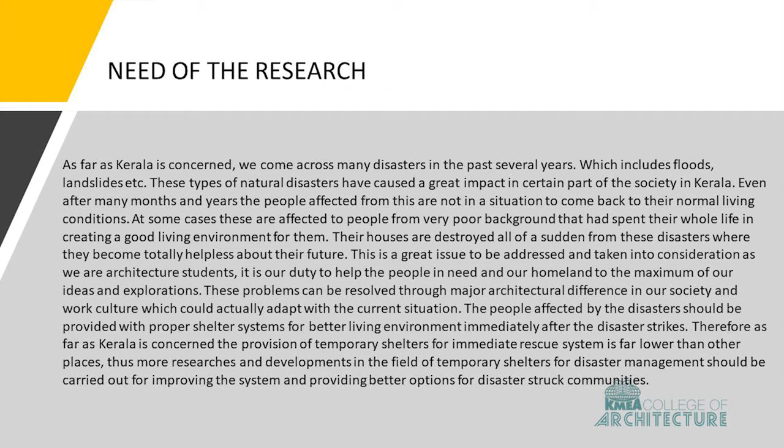The importance of these temporary shelter systems comes in the immediate aftermath of the disaster, and if these temporary shelter systems are properly executed, it can reduce the impact of the disasters and also provides better livable spaces for the disaster struck people until a permanent solution is carried out. So the topic explores the role of prefabricated modular structures in disaster rehabilitation.

Now coming to the central research question, how prefabricated modular structure systems can be used in creating livable space for different phases of disaster rehabilitation process. And the main aim of the research is to study the possible improvements in various phases of disaster rehabilitation with prefabricated modular structures.

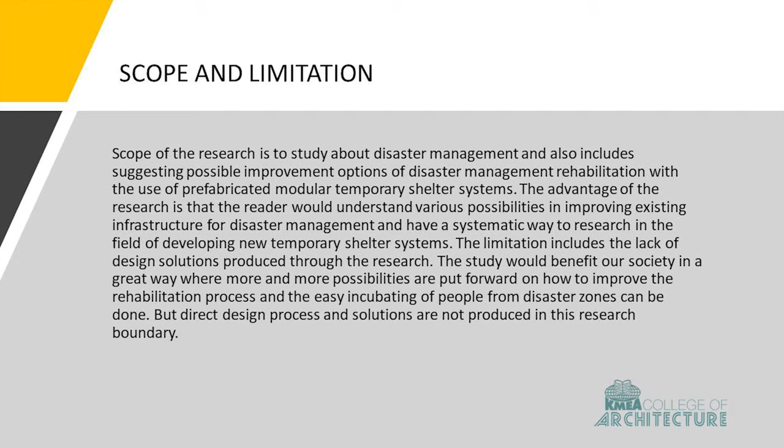The main aim of the literature review is to find out the importance and role of prefabricated modular structures in disaster management and various application and examples of temporary shelters around the world during a disaster. So the first part of the literature review is a study on disasters and its types, which includes various recurrent disasters happening in India and its impact on the society, economy and life of the people.

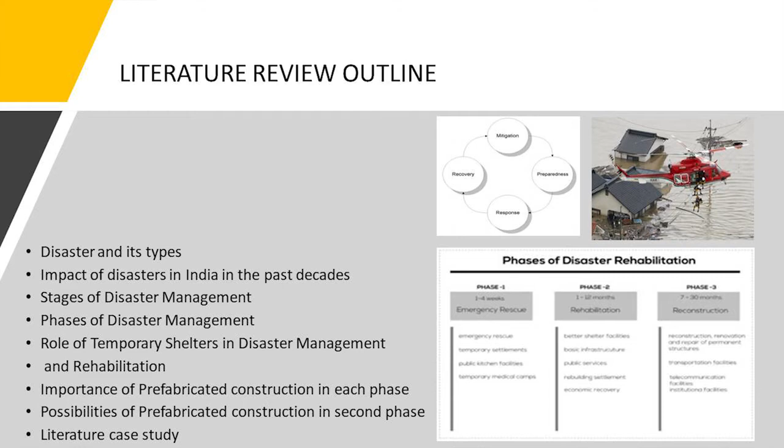Once this part is over, different stages of disaster management are discussed, namely mitigation process, preparedness in disaster management, response systems after disaster and rehabilitation process. Now elaborating on the rehabilitation process, it is divided into three phases. These three phases are studied in detail and further analyzed to know which phase requires more involvement of temporary structures.

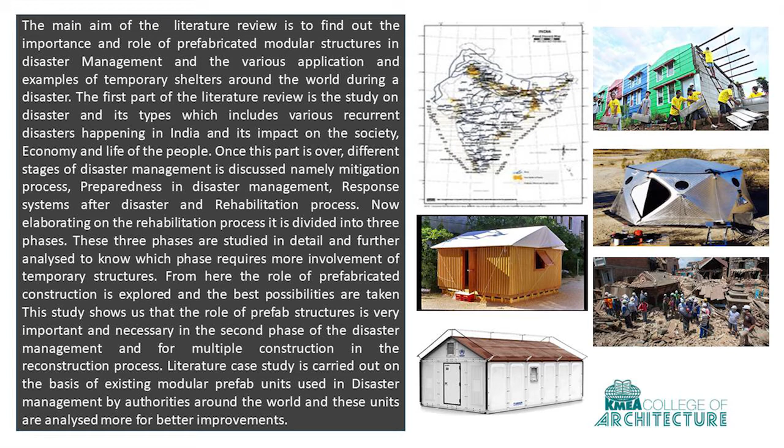From here, the role of prefabricated construction is explored and the best possibilities are taken. This study shows us that the role of prefabricated structures is very important and necessary in the second phase of the disaster management and for multiple construction in the reconstruction process.

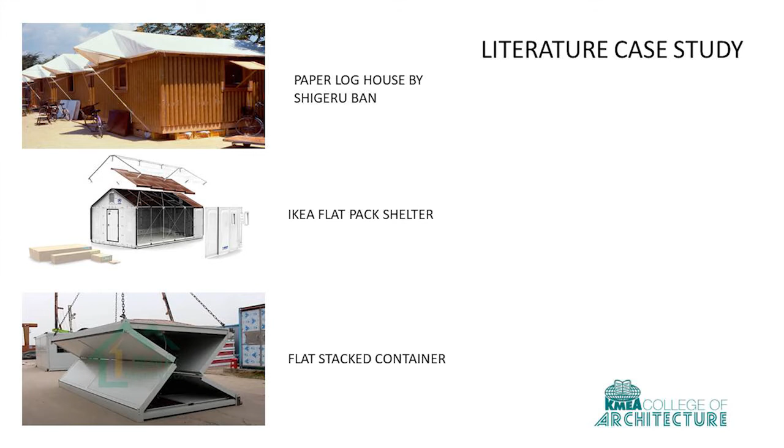Literature case study is carried out on the basis of existing modular prefab units used in disaster management by authorities around the world, and these units are analyzed more for better improvements. The literature case studies done in the research are Paper Log House by Shigeru Ban, IKEA Flat Pack Shelter Systems, and Flat Stacked Container Solutions in Japan.

As an inference from the literature review, we can come to an understanding that the disaster management and rehabilitation process could be made easier and faster with advancement in technology, innovation and exploration of materials. Certain materials such as containers, sandbags, cardboard tubes, fiberboards and bamboo are really effective in creating fast structures for rehabilitation and incubating people from disaster zones.

The knowledge gap of the study is that around the world there are many examples of optimum shelter systems which have to be analyzed and applied in our context. Throughout my research, I have analyzed a few good examples of temporary shelter systems. Once the analyzing part is over, the best possible improvements in terms of materials are provided according to Kerala's present situation. Therefore, the study provides a systematic manner for gathering information and details towards providing optimum temporary shelter systems for Kerala with prefabricated modular structures.

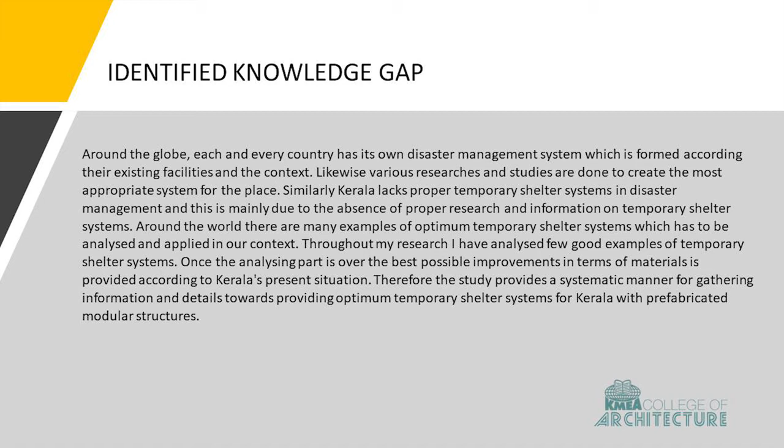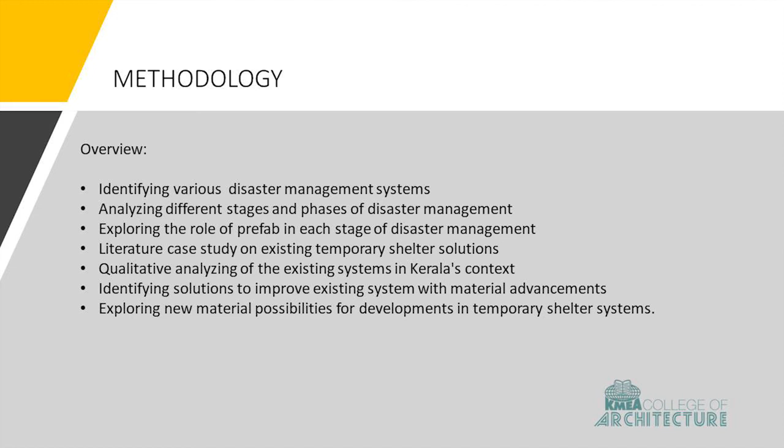This chapter presents the methodology that was followed to complete the dissertation objective. So the first part of the study goes on with identifying different disaster management systems around the world and also analyzing different stages and phases of disaster management as mentioned in the literature review. Once this part of the study is done, the research goes to the second part, that is exploring the role of prefabricated modular structures in each phase of the disaster management.

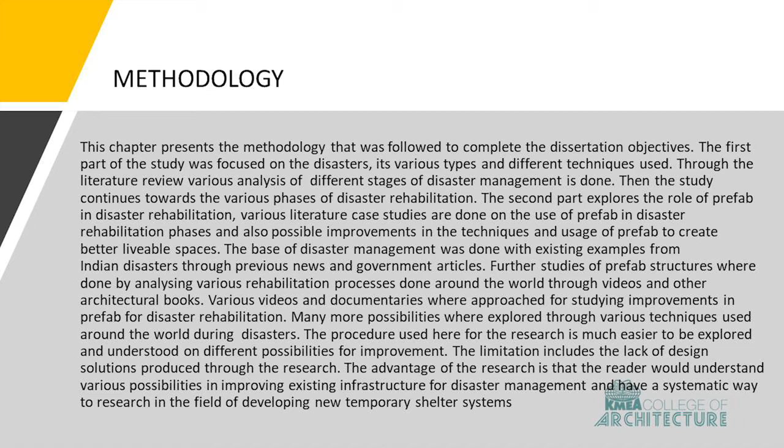Further, the literature case study is done on existing examples to know the manner of the shelter system. This step-by-step process gives us the overall information on how a temporary shelter should be and its importance, and also the role of prefabricated structures in creating better shelter systems. After this process, I have analyzed the existing system in Kerala's context with qualitative aspects for an optimum solution.

From this, I have come out with various improvement possibilities in terms of materials during disasters in Kerala, which can provide better options for temporary shelter solutions and thus decreasing the impact of the disasters.

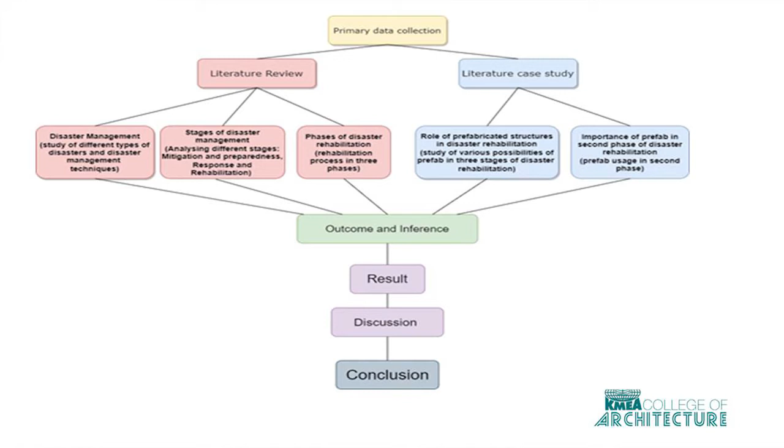In the results chapter, the shelter systems mentioned in the literature case study are taken into consideration, and further these shelter units are analyzed with respect to qualitative aspects for an optimum shelter system in Kerala's context, mainly climate, availability of materials, stackability, transportability, ease or speed of construction and assembly, foundation, modifiability, durability, sustainability, cost feasibility, structural stability, involvement of public, use of machinery, portability, mass construction, thermal insulation, dismantling possibilities, and skilled labor requirements.

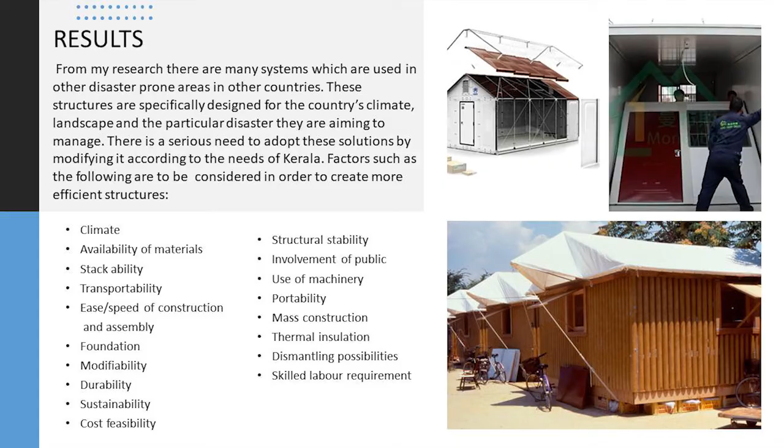First, while analyzing the paper log house by Shigeru Ban with respect to the qualitative aspects, we can conclude that cardboard tubes are not suitable for Kerala's climate, making it less durable. Therefore, replacing the cardboard tubes with bamboo will increase the efficiency of the model greatly, as bamboo can withstand external forces better than cardboard tubes and is also very durable.

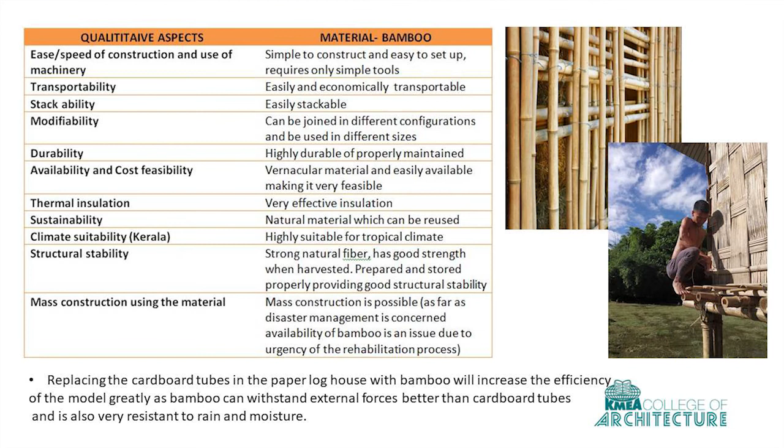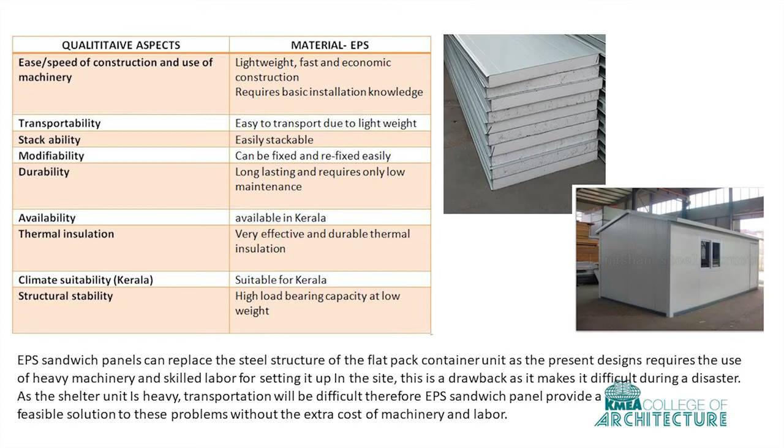While considering the flat pack container solutions used in Japan floods, it requires heavy machinery and skilled labor for setting it up, which is a drawback as it makes it difficult during a disaster. As the shelter unit is heavy, transportation will be difficult. Therefore, EPS sandwich panels provide a feasible solution to these problems without the extra cost of machinery and labor, and these EPS panels can be used in the same mechanism as the flat pack container solutions.

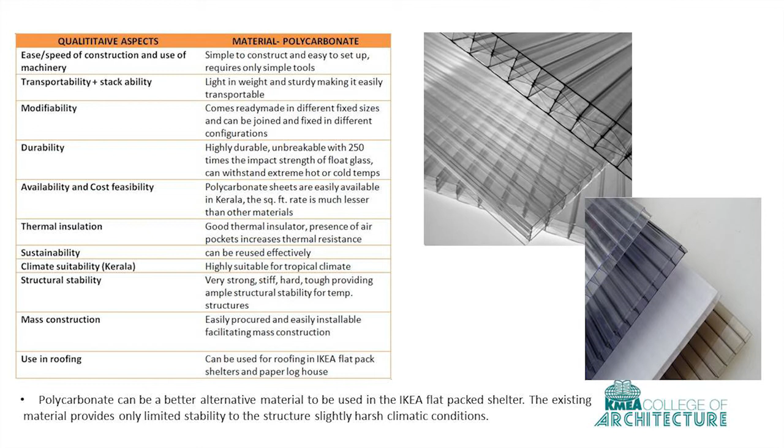While considering the IKEA flat pack shelter systems, in Kerala's context it cannot withstand very harsh climatic conditions due to the lack of structural stability. Therefore, polycarbonate panels can be a better alternative material to be used in the system for better stability and also a better solution with respect to other qualitative aspects.

The GFRG panels are very suitable to be used during the second and third phase of disaster management, because construction can be carried out at high speeds with low cost using GFRG panels, which is very important when rehabilitating disaster affected people during and after a disaster. It is also a good solution for mass construction during disaster rehabilitation, including makeshift hospitals and mass housing projects.

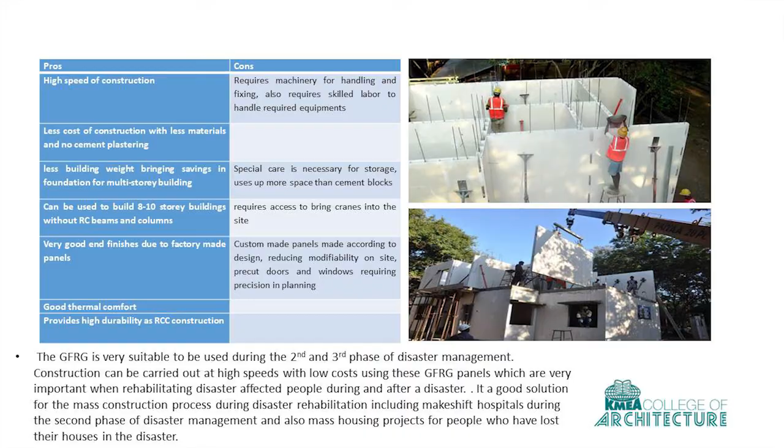In the discussion chapter, what I would like to mention is that during a disaster, the affected people lose almost everything except their life. These people require mental, physical, and material rehabilitation due to the huge loss brought in by the disaster. The most necessary need after medication and food is a proper shelter.

In the event of a disaster, time is a very limited resource, so the rehabilitation process is a difficult task. The only feasible option is to build temporary shelters for the affected population. This is where prefab gains significance. Prefab shelter systems can be very easily used during the second and third phases of disaster management. Ease in setup and construction in a short period of time makes it appropriate for the task.

Materials such as polycarbonate, EPS sandwich panels, and GFRG panels are the main striking developments in this paper to support the main aim of this study. These materials are used in permanent structures, but this study focuses on their role in creating very feasible temporary shelters. The use of these mentioned materials will pave the way for new developments in this area of materials and other developments in proper shelter systems.

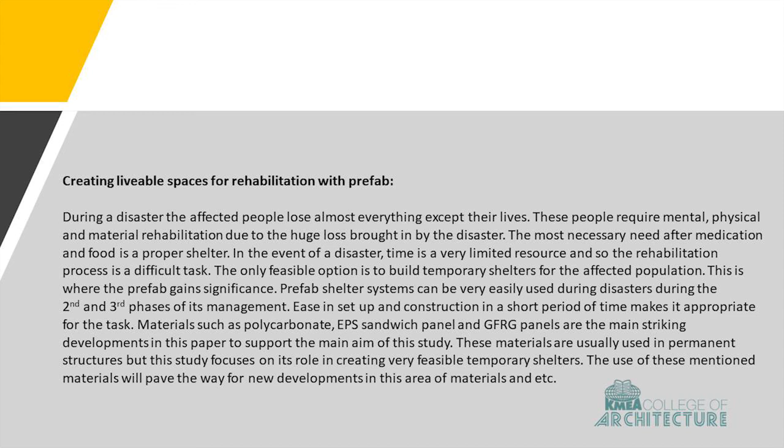As a conclusion, as any shelter must function within the limits of what's affordable, temporary shelters should be constructed quickly and simply while encouraging local participation and having the ability to mitigate damages from future events. Temporary structures are the most important aspect as far as a disaster is concerned, for the better safety of the disaster-struck population. Therefore, more solutions could be discovered in terms of materials used and their implementation and processes.

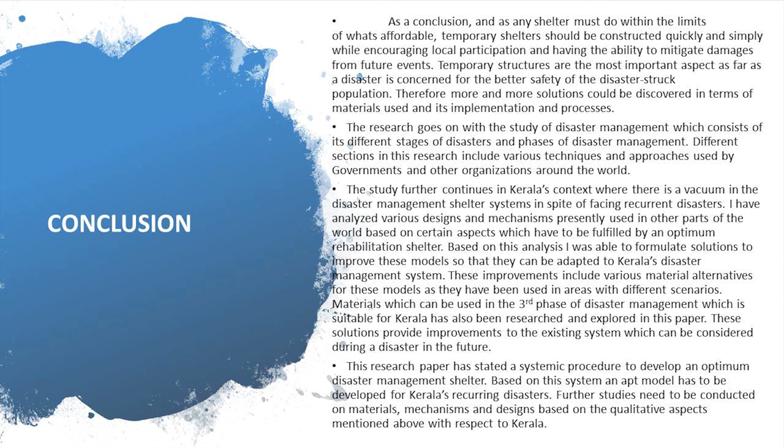So this research paper has stated a systematic procedure to develop an optimum disaster management shelter. Based on this system, an apt model has to be developed for Kerala's recurring disasters. Further studies need to be conducted on materials, mechanisms and designs based on the qualitative aspects mentioned above with respect to Kerala. Thank you.